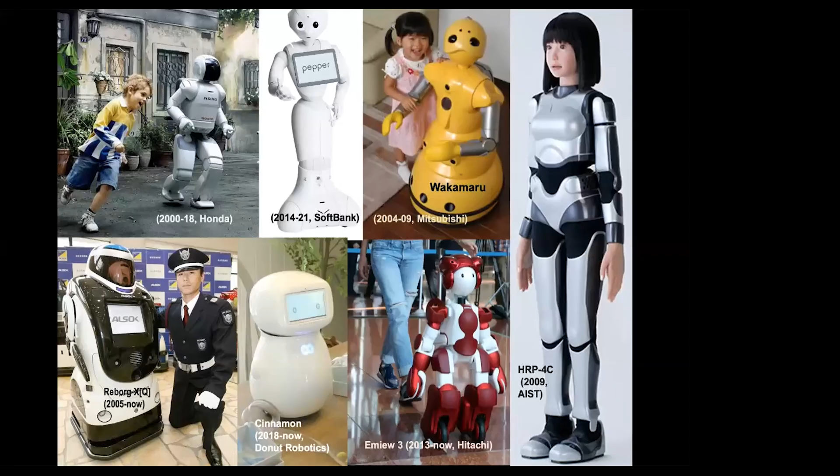A number of Japanese roboticists have designed their gendered robots based on simplified sex and gender stereotypes of human, female, and male bodies. Moreover, some of these gendered robots are programmed with algorithms, or AI, similarly based on the presumption of inherent human, female, and male behavioral differences. In the short time I have available today, I will focus primarily on what I and others find problematic and even troubling about the construction of gender in robot design and AI algorithms.

Obviously, I'm not alone in expressing concern about robot design and AI. Some of you may have seen this article in The Guardian on the 9th of February, and I quote: Images posted on social media are analyzed by algorithms that decide what to amplify and what to suppress.

Many of these algorithms, the Guardian investigation has found, have a gender bias and may have been censoring and suppressing the reach of countless photos featuring women's bodies. For example, Google's algorithm scored a picture of a pregnant belly as, quote, very likely to contain racy content. And Microsoft's algorithm was 90% confident that the image was sexually suggestive in nature.

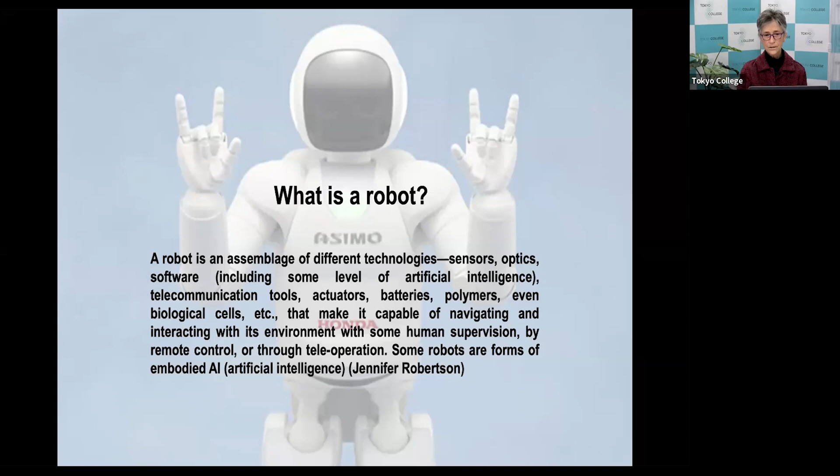Robots are made from many different materials: aluminum, stainless steel, thermoplastic polymers, polycarbonates, acrylics, silicone, even biological cells, and they exist in many different shapes and sizes.

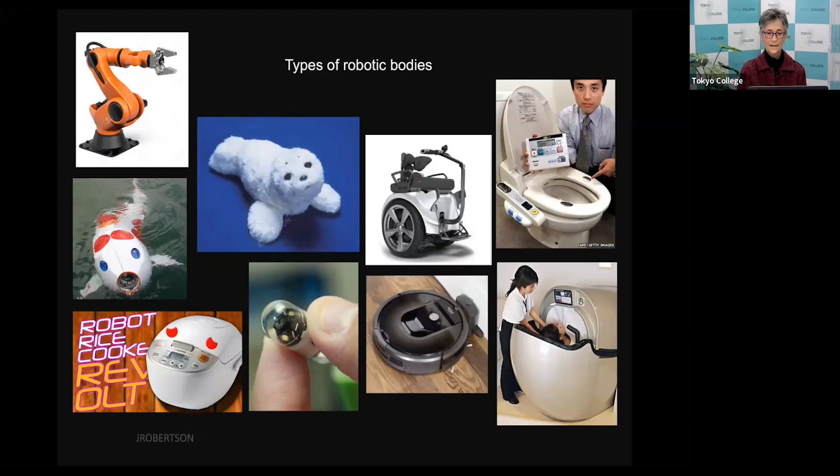Humanoid robots have a body that resembles a human being in the sense of having something like a head, arms, torso, and legs. And as you see here, most humanoids are gendered, and some, called androids, have silicone faces and hands that can pass, from a distance at least, as flesh and blood human beings. They are immobile, apart from making teleoperated facial expressions and vocalizations. And I'll be talking a bit more about these androids later.

Now, a 5-year project to develop humanoid robots was launched by the Ministry of Economy, Trade, and Industry, or METI, in 1998. And Honda's masculine gendered ASIMO was one of the first humanoids introduced to the public in 2000. Many humanoid robots like ASIMO, whose production ended in 2018, are not end products in themselves, but rather they are research platforms. Now, humanoids and robots in general are very expensive technologies, and humanoids in particular are very challenging to build.

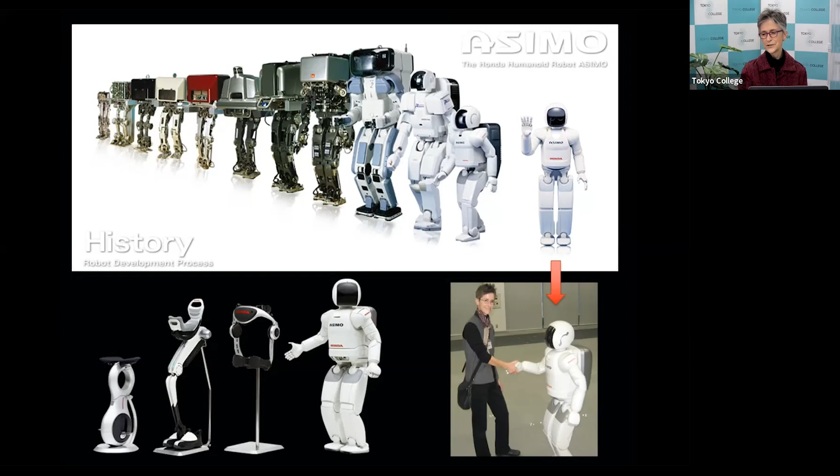Now, what's an algorithm? What is AI? Briefly, in computer programming, an algorithm is a set of finite instructions or rules to be followed in calculations or other problem-solving operations. AI is basically a group of algorithms that create and categorize new data from these problem-solving operations. These new data, in turn, allow a computer or robot to operate automatically or intelligently without direct human intervention, up to a point. There is no universal definition of AI, and there are many competing definitions.

And when asked, most people on the street would provide not a definition, but rather an example of an AI application, such as Apple's Siri or Google search engine.

AI, as a group of algorithms or finite rules, is very useful for streamlining certain quantifiably calculable processes, like moves on a chessboard or Go board, which are informed by pattern recognition. But one of the pitfalls of AI is that it cannot think outside the box, so to speak. It cannot think outside the board game. It acts on prior data.

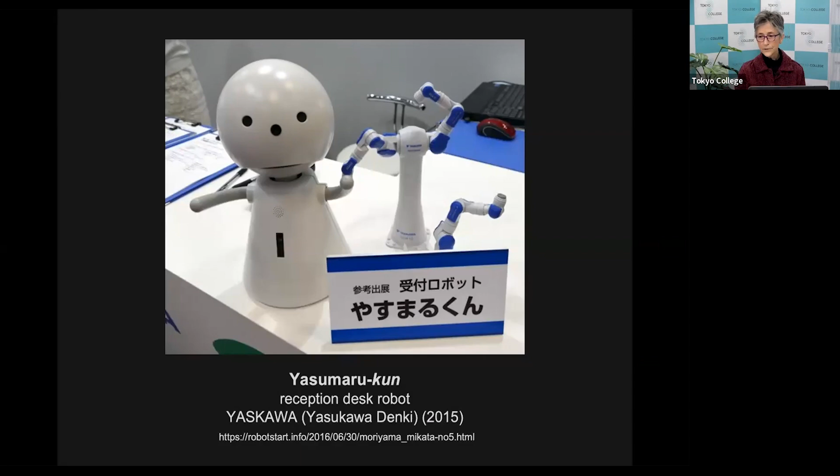The gender of other robots is sometimes ambiguous to the untutored eye. Wakamaru, for example, was first marketed by Mitsubishi Heavy Industries in 2005 as a household valet and babysitter, but that proved impossible because of safety concerns and also the cost.

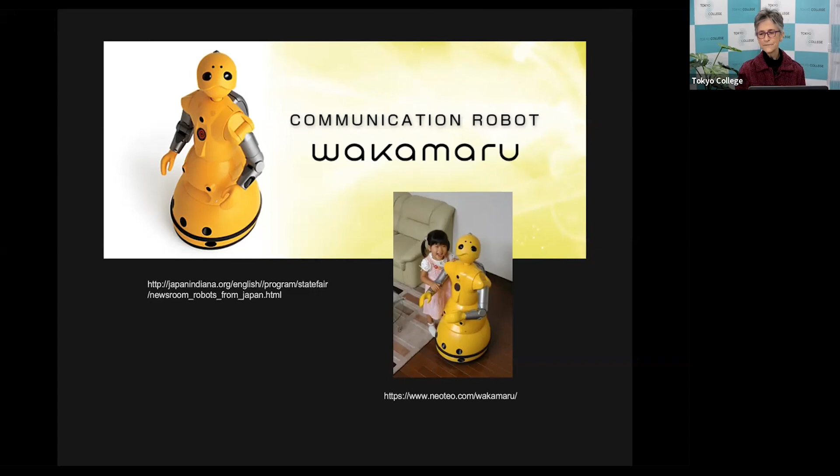Now, when I show audiences in the United States and Europe a picture of Wakamaru, many perceive a feminine robot on account of its petticoat-like shape. But Wakamaru was designed as a masculine robot.

His 1-meter-tall conical body on wheels resembles the shape of yoroi, medieval samurai armor. Moreover, Wakamaru's name was inspired by the legendary 12th century samurai, Minamoto no Yoshitsune, whose childhood name was Ushiwakamaru, young ox.

The two sensors, which are infrared and ultrasonic, on the robot's forehead supposedly resemble Yoshitsune's eyebrows. The designer selected yellow for Wakamaru's body because he declared it's a color that attracts attention, is invigorating, and conveys happiness.

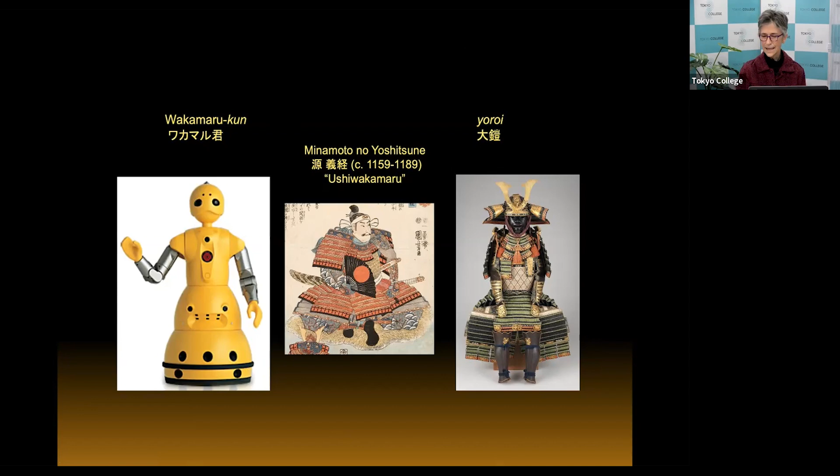One of the most technologically advanced humanoid robots that debuted in 2009 is HRP-4C, the Humanoid Robotics Project for Cyborg. She's a creation of AIST, the National Institute of Advanced Industrial Science and Technology in Tsukuba. It's the Japanese MIT, basically.

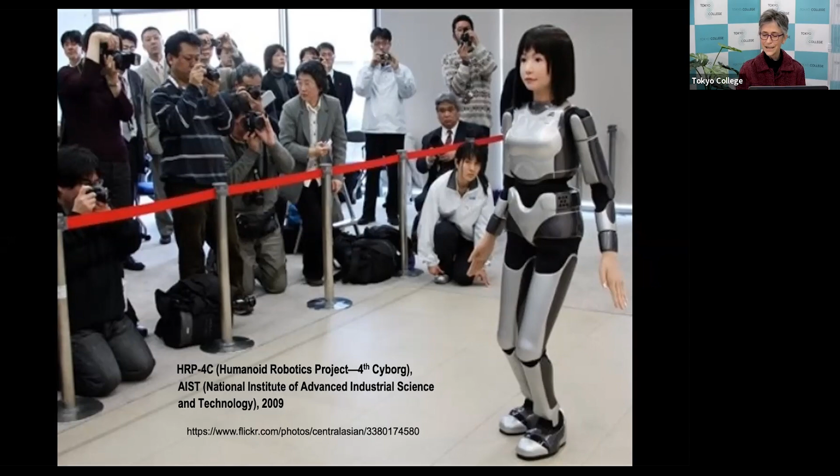HRP-4C is a cyborg in the sense that her face and body proportions are based on the average 20-year-old Japanese female. She's 1.6 meters tall and weighs about 43 kilograms, which is about 10 pounds lighter than the average young woman.

The technological reason for her design and development was to reproduce human-like bipedal walking using a motion capture process in recording and programming. Of course, a masculine robot could have served the same purpose.

But in any case, the robots focused on four characteristics of human bipedalism: heel-to-toe walking motion, single toe support, knee stretching, and swing leg motion. So HRP-4C has a much more natural human-like walk than Asimo does. Asimo is very flat-footed and his knees are always bent for stability when standing and walking.

I want to point out something many people don't know: all of these robots are equipped with noise filtering shoe soles, as the sounds of locomotion and all ambient and accidental sounds in the environment are read as data by robots. Without major noise filtering algorithms, which take up a lot of memory, mobile robots would develop software glitches and break down.

HRP-4C is nicknamed Miim, and I couldn't find an official explanation for her nickname, but I surmise it may be a reference to meme, in reference to patterns or elements that can be imitated. Also, neuroscientists explain that a meme is a perceived behavioral scheme that can be translated by the brain into an action scheme, making the imitation of the perceived behavior possible.

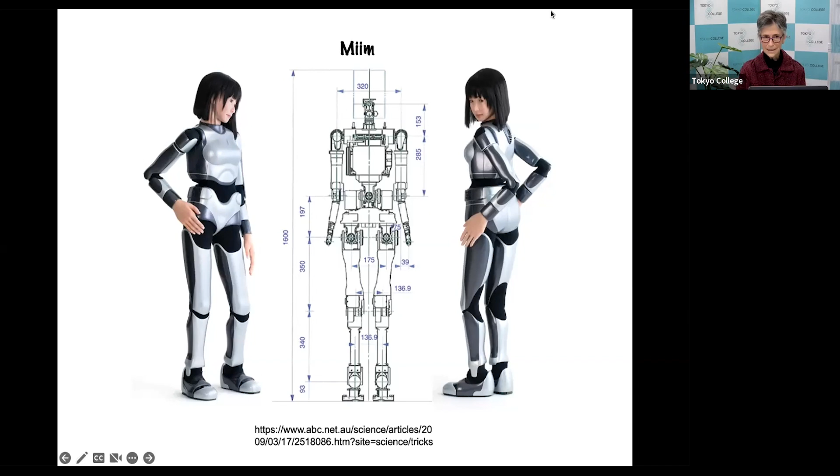Framed by shoulder-length black hair in a pageboy style, her silicone face was fashioned from a composite photograph of five female secretaries at the lab where she was created.

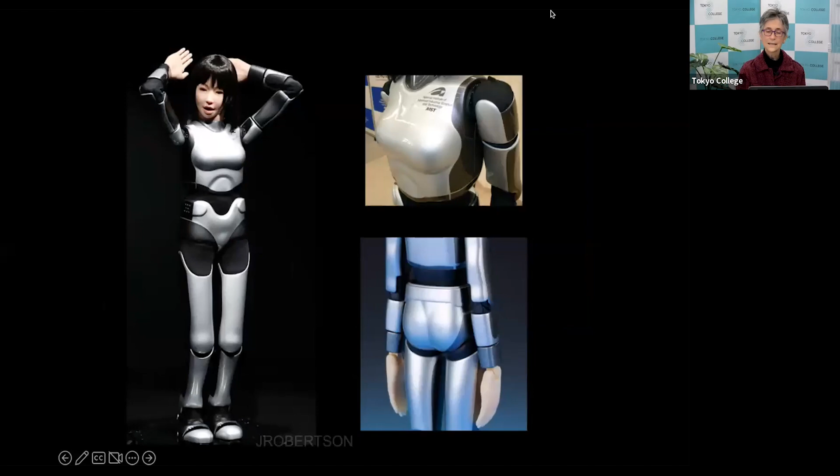Like her face, Miim's large hands are also covered in silicone skin, but the rest of her anthropometrically scaled body is made of silver and black plastic. And I never got a good answer as to why a robot body needs such realistic anatomical features, or what the five secretaries thought. That's another matter.

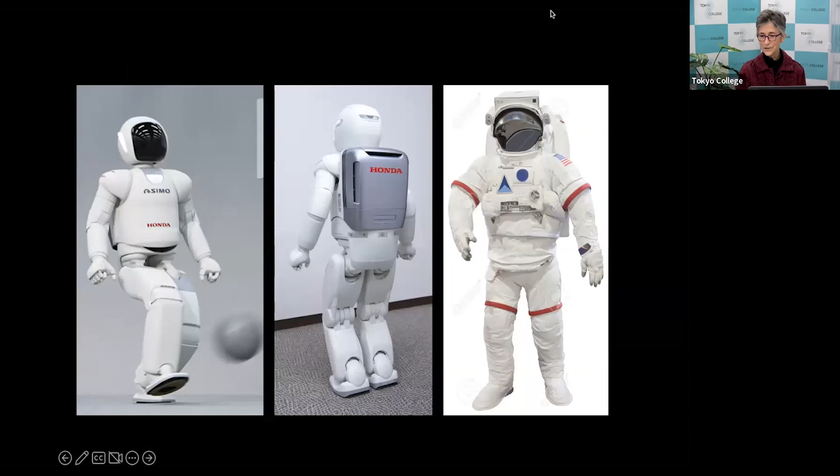Is she naked? Her cousin Asimo was modeled after a suited astronaut. At public events, Miim often appears clothed, cosplaying as a bride, a dancer, a French maid, and as the popular anime Vocaloid, Hatsune Miku.

One of her only real-world functions is as an entertainer. She sings and she dances. Let me show you a video here.

Well, hopefully you can hear it. If you can't, you can watch your own video.

I think you get the idea. I just want to note the incredibly complex technology that enables a bipedal robot to lift and balance on one leg, and to move in sync with the music. These are innovations that are parlayed into some of the spin-off industries I mentioned earlier.

At this point, I want to shift to a comparison of human and robot bodies with respect to sex and gender. There are at least two kinds of human bodies, the female body and the male body. That said, female and male bodies themselves are distinguished by a very broad spectrum of biological variability, from outward or phenotypic appearance—size, shape, color—to biochemical constitution—hormones, chromosomes—to post-puberty physical capabilities like menstruation, pregnancy, lactation, ejaculation, and so forth.

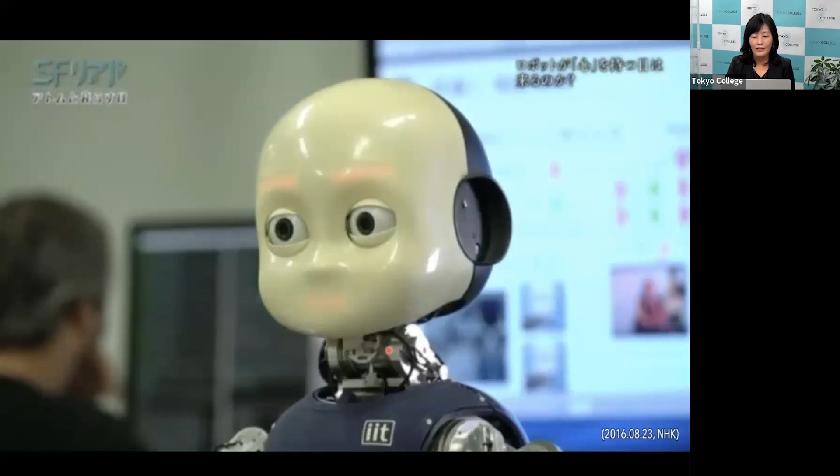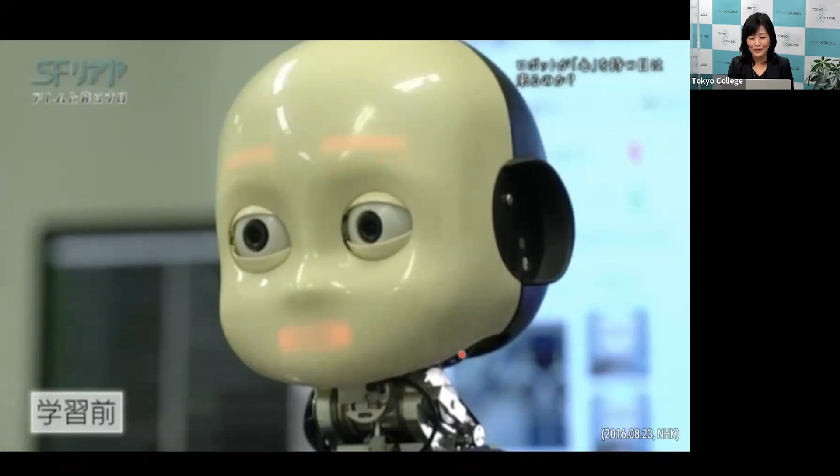Let me start with one video clip to explain my research interest in robotics. My research group has been developing a computational neural network model which enables our humanoid robots to socially interact with human caregivers. This is the robot developed at the Italian Institute of Technology, called iCub. When I introduce this robot, I call him a masculine robot. With this robot, we have been investigating what kind of neural network model enables our robots to acquire communication abilities with human caregivers, like emotional interactions, imitating human behavior, and so on.

Let me show you one video clip showing how human brains are very good at attributing social intentions or social information to very simple figures. This is from a well-known psychological experiment conducted 80 years ago. In this video clip, you can see three geometric figures interacting with each other, with no additional information. Just two triangles and one circle are moving in this environment. Interestingly, researchers found that people tend to attribute social information to these figures.

For example, now the triangle is moving toward the small triangle. Maybe people think, okay, this big triangle is getting angry toward the small triangle. Or maybe there are different emotional or intentional behaviors there. For example, the big triangle wants the small triangle and the small circle to be separated. Maybe the big triangle plays the father of the small circle, which might be the daughter of this family.

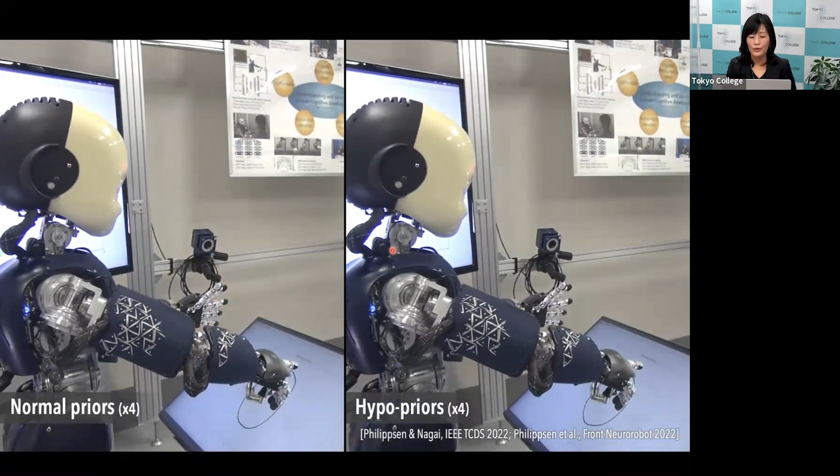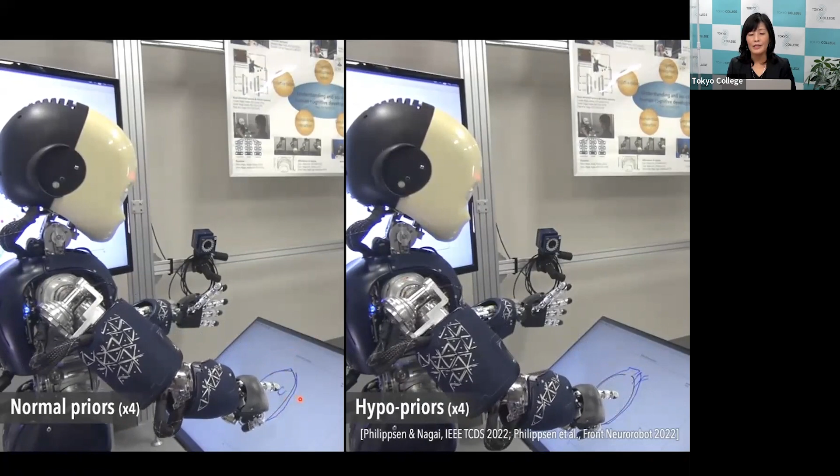To investigate what neural mechanism may enable our robots to show such diverse behavior, we designed a computational neural network model which can generate diverse behavior by manipulating some parameters in the robot. Here you can see two types of robot as an example. The left one is very successful in completing the missing parts of the figures, whereas the right one is not successful, showing some scribbling behavior like young children.

This is the neural network model we used. I won't explain the details, but the idea is that just by changing only two parameters in this neural network model, we could show diverse behavior in the robots, indicating that stereotypical characters or features in a robot's brain develop only through proper predictive learning.

And if the balances between the top-down predictions and bottom-up signals are not well created, then the robot also shows diverse behaviors.

So based on this result, I'd like to ask two questions. The first one is about the balance between stereotyped minds and diverse minds. In our experiment, we showed that diversity is very important, which is of course obviously observed in child development. But on the other hand, we can also observe that stereotyped minds or stereotyped attributions are very beneficial for robots to more efficiently recognize the world and interact with social partners.

So I think there is balancing between such stereotyped design and diverse design that might be important. How can we make the balance between stereotyped minds and diverse minds so that we can take advantage of these two different types of minds or designs of robots? This is the one question I want to discuss with Professor Robertson.